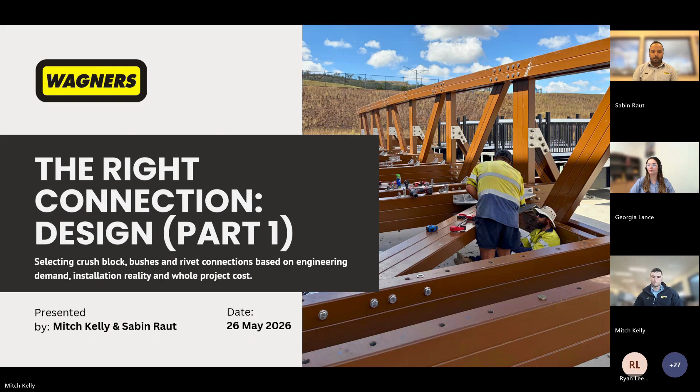So we'll work through some basics of the design, then look at 3 real optimization examples where connection detailing was refined to improve constructability and costs without compromising structural performance. So by the end of this session, you should be able to answer 4 practical questions. First one is, what are the 3 main types of connections used in FRP structures? Second, how do load type, direction and magnitude influence selection of these 3 connection types? Third, how do hollow profiles and fiber orientation affect performance?

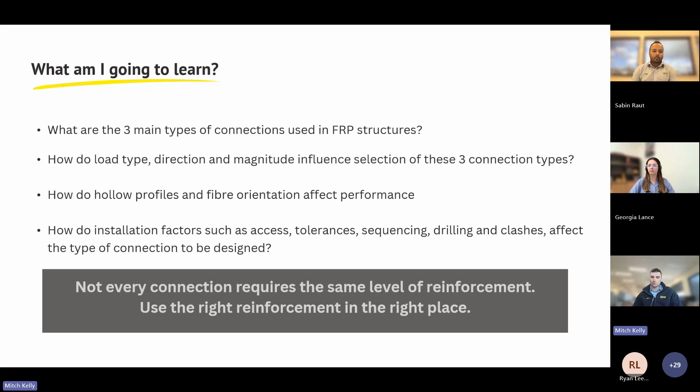And finally, how do installation factors such as access, tolerance, sequencing, drilling and clashes affect the type of connection to be designed? So the aim is not to memorize a single rule. The aim is to understand the decision process so we can use the right connection type in the right place. So what are we going to cover? We're going to start with why connections often govern FRP performance, because connections are where the load path becomes most concentrated. Then we will look at FRP material behavior and common failure modes, because FRP does not behave like steel or solid timber.

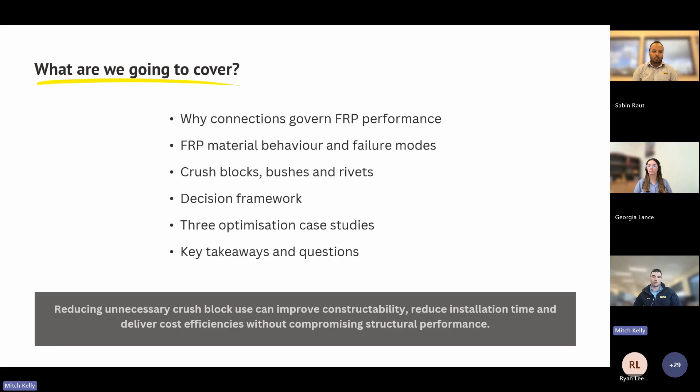So why do connections matter? In any structure, the member or structural component itself can be strong, durable, and well designed, but if the connection does not transfer load correctly, the system will underperform. For FRP, this is especially important because the material is directional and connection loads can introduce localized failure modes. So when we talk about connection design, we're really talking about facilitating the load path.

So for an example structure, loads need to be transferred from the deck to the joist to the bearer, from the bearer to the column or pile, and then ultimately into the foundation. And at each transfer point, the connection becomes a critical stress region.

So just a photo here, the Hyatt Regency walkway collapse is a well-known reminder that connection detailing can govern structural performance. So in that case, the failure was not because the idea of a suspended walkway was inherently impossible. The issue was the connections and how the detail actually carried the load. So not overly relevant to the presentation, but a reminder that the devil can be in the detail with connection designs, and an oversight can have disastrous effects.

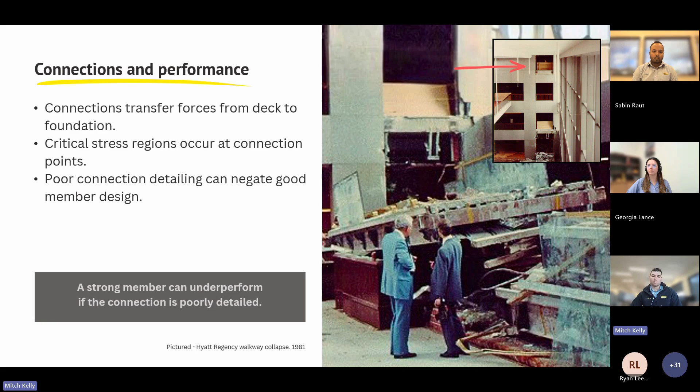So the central idea I want to highlight in this presentation is engineering judgment. Basically, there's not going to be a one-size-fits-all connection type, and a number of things need to be considered. I mentioned crush blocks earlier, and we'll get to them shortly, but the aim is not to remove crush blocks. Crush blocks are important and necessary in the right locations. The aim is to stop using them where the connection selection framework does not justify them.

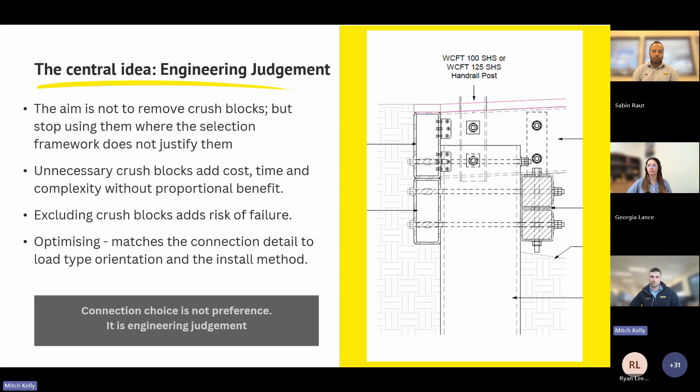If we add a crush block where it is not necessary, we add direct supply costs and installation time and complexity without a proportional structural benefit. And obviously, if we completely exclude crush blocks, then we risk crushing, pull-out, delamination, fatigue, or poor long-term performance. So optimization sits between those two extremes, and it means matching the connection detail to the load type, orientation, and the installation methodology. That is the mindset that will become key when we get into our case studies.

Okay, before we compare connection types, we need to look at why FRP connection design is different to traditional materials. So FRP is very strong, lightweight, and corrosion resistant, but it is not isotropic, it is anisotropic, which means it does not behave the same in every direction. This becomes a key consideration for connections.

So pultruded FRP has a very strong longitudinal performance because the fibres are predominantly aligned along the length of the member. If you can imagine trying to pull apart a plaited rope, it is very strong. But transverse is different. It is not as strong due to having less fibre percentage in the transverse direction. So loads acting across the fibre direction, through the wall or around a fastener hole can create local effects that do need to be managed. FRP also has a lower shear modulus than steel, so local deformation and load transfer need to be considered carefully.

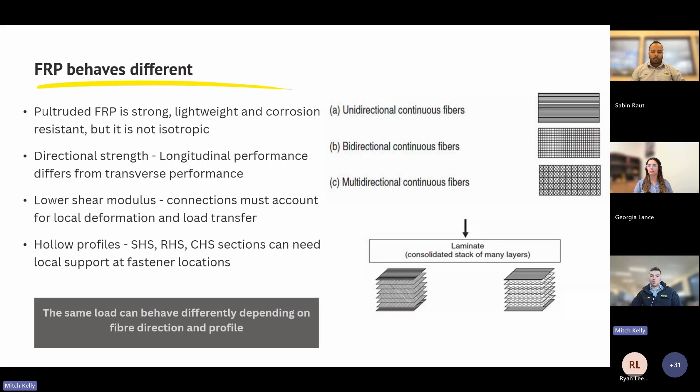And because many structural FRP profiles are thin, hollow walled sections, such as SHS, RHS, and CHS sections, the wall of the section may need local support at fastener locations. So that's where crush blocks and crush tubes come in. So the same external load can require a different connection depending on the fibre direction and the profile you're using.

So section geometry is often the difference between a necessary crush block and an unnecessary one. Wall thickness affects local bearing and crushing resistance. A thin wall will obviously behave differently to a thicker wall under the same load. And hollow sections can also be vulnerable to local wall deformation, particularly when a bolt is over tightened or when you introduce a load through a small contact area. And as touched on before, loads acting along the fibre direction is not the same as going across the laminate.

So as counterintuitive as it might sound, using a larger profile to reduce connection complexity may end up being the better option for a project. As a rule of thumb, thin-walled hollow sections with transverse load demand tend to require crush blocks. Thicker wall sections or connections dominated by longitudinal force may be able to use bushes or riveted brackets.

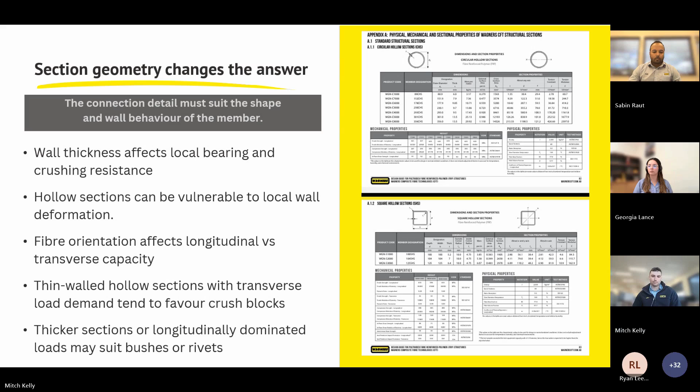Connection design, especially in FRP, is really about managing local failure risks. Fastener holes can create stress concentrations. That means the area around the hole can become a starting point for failure if the load is not properly distributed. FRP can also be more vulnerable where loads act through the thickness of the laminate because that's not where the material is typically strongest, as mentioned. And if the load is poorly distributed, the laminate can delaminate, which means the layers of the FRP can actually pull apart rather than acting together. This would generally be at risk, similar to before, when you're using thin-walled hollow sections when the load is in the transverse direction.

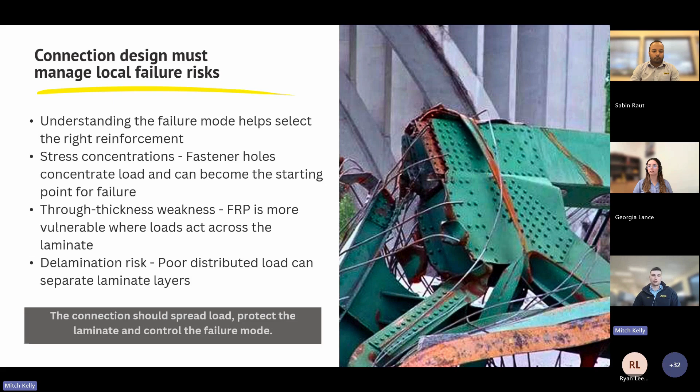Some other common failure modes need to be considered in FRP and probably generally in other materials as well. So bearing failure, local damage on or around the contact point by a concentrated load. Net tension, which is when the remaining section left around a hole is not sufficient to carry the tensile force. Shear out occurs when the fastener tears a path towards the edge of the member. Cleavage is a splitting type failure, delamination is separation of the laminate layers, as mentioned, and bolt pull through occurs when the fastener or washer zone pulls through the section.

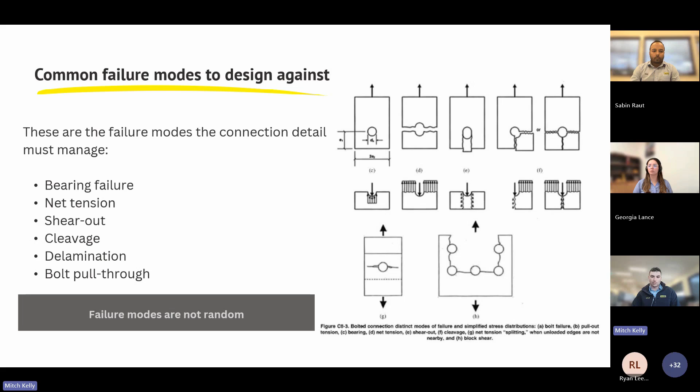The important point is that these failure modes are not random. They are influenced by load direction, magnitude, edge distance, bolt hole sizes, bolt spacing, and wall thickness.

Now that we have covered the material behavior, we can look at the three main practical options used in FRP design. The three options are crush blocks or inserts, bushes or crush tubes, and rivets. Each has its place, and the challenge is deciding on the best option for each connection.

At a high level, crush blocks provide the highest local reinforcement for high demand bolt joints. Bushes provide a middle ground solution. They support the bolt hole and help distribute local stress and improve bolt performance where full transverse reinforcement is not required, as well as eliminating the crush of the hollow sections when the bolts are actually tightened. Riveted connections are usually in conjunction with a bracket and are permanent, efficient, very fast, and for lower demand joints, particularly where access or alignment makes bolting more difficult.

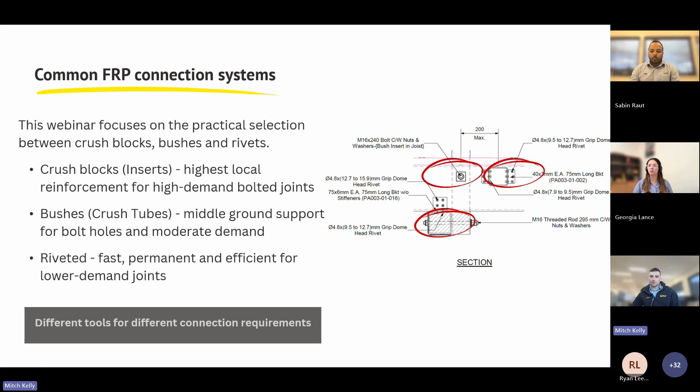The right system depends on loading, FRP properties, as mentioned earlier, and the installation method, so access, sequencing, and site limitations. We should not think of these as good or bad options. We should think of them as different tools for different connection conditions.

Crush blocks, when they are required. Crush blocks are required where the connection needs the highest level of local reinforcement. Typical triggers for these are high compression, high bearing, high shear, or high pull-out loads. They're also important where long-term bolt preload is critical to be maintained, and where the dominant stresses act transverse to the fibre orientation, as I was saying before, or when wall buckling is at risk for a thin-walled profile.

So they therefore are generally appropriate for high consequence primary structural joints where we need the most robust connection behavior. More often than not, in those situations, the crush block is not overkill. It is the correct engineering response for the demand.

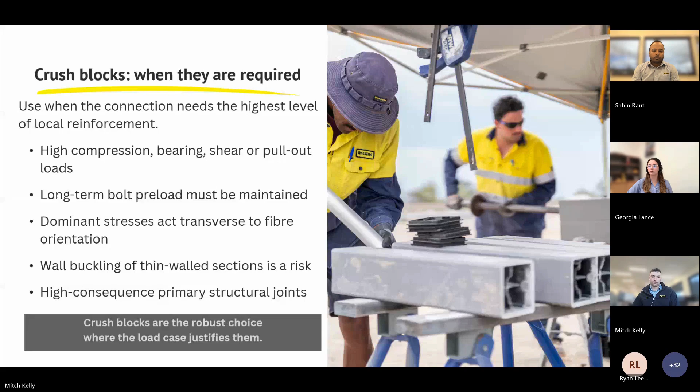Crush blocks, when they may be more than needed. The issue is not in the use of crush blocks. The issue is using them everywhere by default. Often crush blocks can be an extreme installation burden.

To install a crush block or insert, the member needs to be pre-drilled in the precise bolt hole location. Then the crush block is pushed down the member and aligned with the hole. That takes time, especially when the detail is repeated many times across a structure. It is also often not feasible when setting out a structure, as the bolt hole locations are sometimes not known until the members are actually installed, in which case it's often too late to be able to push the inserts in. And they also generally allow for no tolerance at all during installation.

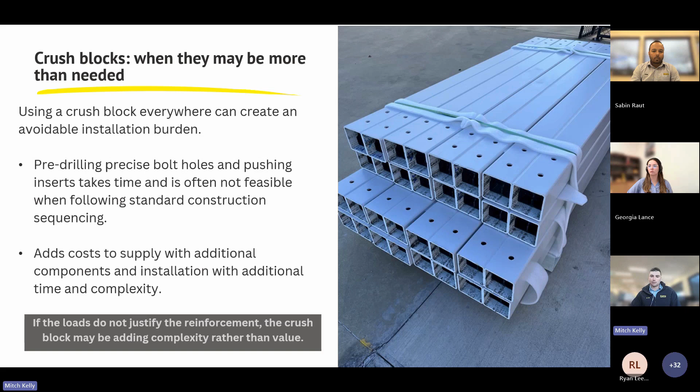And they also just add additional costs, supply costs through extra components, bolts, brackets, additional drilling, especially when you can potentially substitute with something like a riveted bracket.

Bushes, or sleeves, or crush tubes, they're a practical middle ground. They're useful where the dominant force is longitudinal or moderate, where pull-out forces are low to moderate, and where crushing demand is lower. So when compared to a bolt alone, they improve bolt torque and tightening capacities, and they help distribute the local stress around the bolt hole.

A bush is not the same as a crush block. It does not provide the same level of transverse reinforcement. But where the demand is moderate, it can protect the laminate and improve constructability without the burden of a full internal insert.

They can be drilled and installed while the member sits in the final position, and are useful when the hole position cannot be central to the member, so they create more tolerance and speed for installation as opposed to crush blocks. That makes bushes particularly useful when you need the performance of a bolted connection, but also want practicality for install.

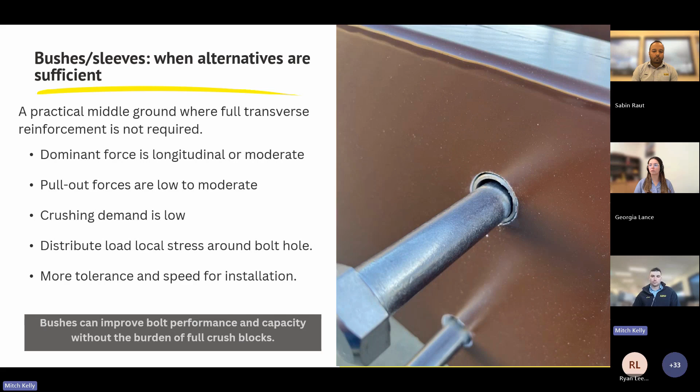Rivets. Rivets are the efficiency option. They suit permanent, lower demand, non-critical connections where the loads are low to moderate. They eliminate all the alignment issues that are present with bolted connections as they are drilled and installed in their final position. Similar to how a nail or screw would be used in timber with an L bracket or plate, that's basically the same principle for rivets.

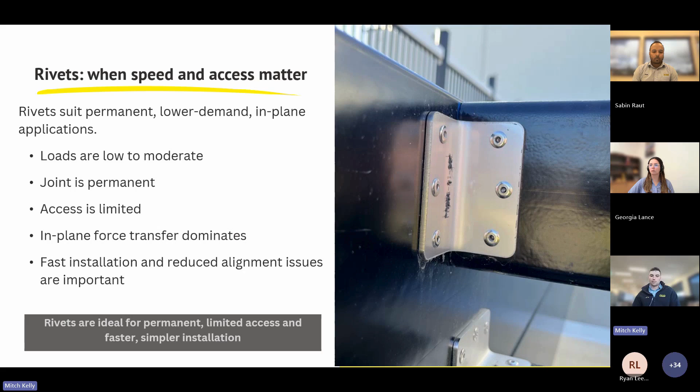Rivets are obviously not going to work in a critical high shear transverse load case, but can often make up the majority of the connections in a structure like a boardwalk. They're the right answer when the load case allows speed, simplicity, and permanence to become the priority.

This slide is important because it challenges a common assumption that the strongest detail is always the best detail, which is not always true. Crush blocks provide the highest security for high demand joints. Bushes provide a good balance where performance and easy installation are needed, and rivets are efficient and fast. Optimized design is about enough strength, safe installation, cost effectiveness, and the best whole of project outcome.

So the question shouldn't really be what is the strongest possible connection. The better question is what is the simplest connection that safely satisfies the engineering demand and can be easily installed.

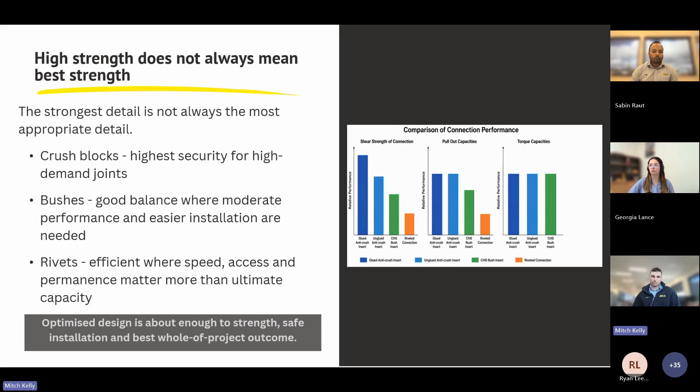Part 4, selection framework. Now we will turn that thinking into a practical selection framework. This is not a replacement for engineering design checks or capacity tables. It is a way to structure the decision so we start in the right place every time.

So the first filter is load. Start by asking what are the types of loads the connection is carrying? Is it tension, shear, bearing, or crushing? Then you ask about direction. Is the load acting along the fibre direction or across it? If it's along, you can use bushes.

Across, you need crush blocks. Then you consider the magnitude. If it's high pull out, high shear, or high bearing demand, you usually have to go towards the crush block. If the demand is moderate, a bush may be appropriate. And if demand is low, a riveted bracket may be sufficient. So the first decision point is just what is the connection actually doing?

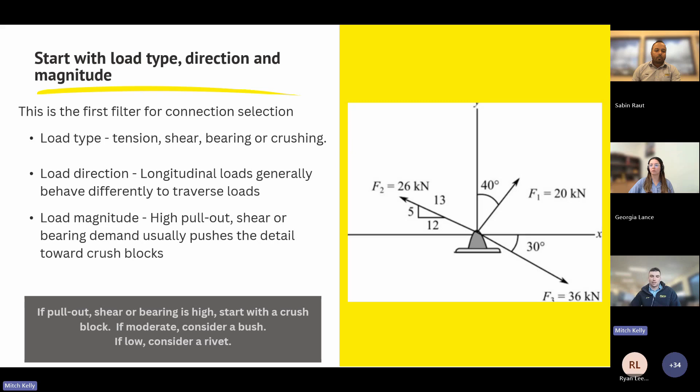The second filter is actually the FRP section. So if you know the load type, direction, and magnitude, now you've got to work out which profile to use. Check the wall thickness and the published connection capacities for the likely FRP profiles you're thinking of using. Then ask whether the wall could potentially crush, buckle, or delaminate, and lock in some potential connection options, as there's always generally more than one connection option, even when you get to this stage.

So it's key to assess each connection point individually as well. Don't assume that one connection detail needs to fit the whole structure, because that can often lead to oversights and missed opportunities for improvement.

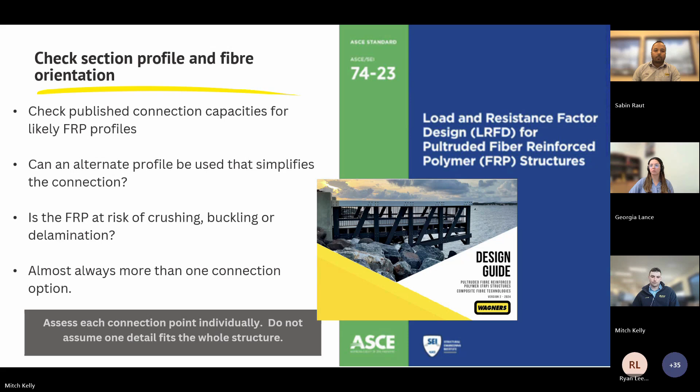And the third filter is installation. A structurally sound detail still needs to be practical and safe to install. This is our last step to really lock in the connection design. Can the installer physically position, align, and complete the connection? Does the detail allow for slopes, bolt hole eccentricity, site drilling, alignment? Does it create clashes, slow assembly, or require extra handling?

How often is the connection repeated across the structure? Access, tolerance, sequencing, drilling, and potential clashes can all determine the best detail, and this is where design and construction need to meet.

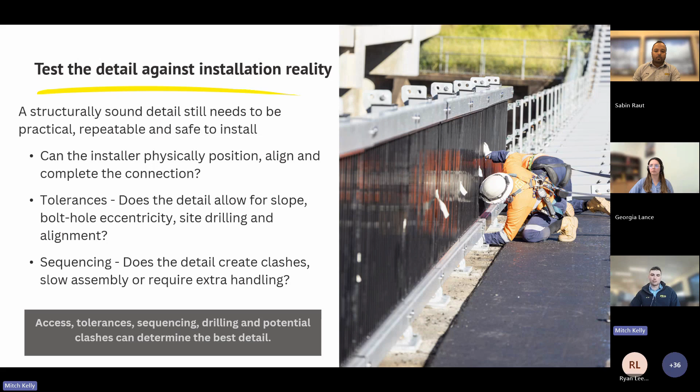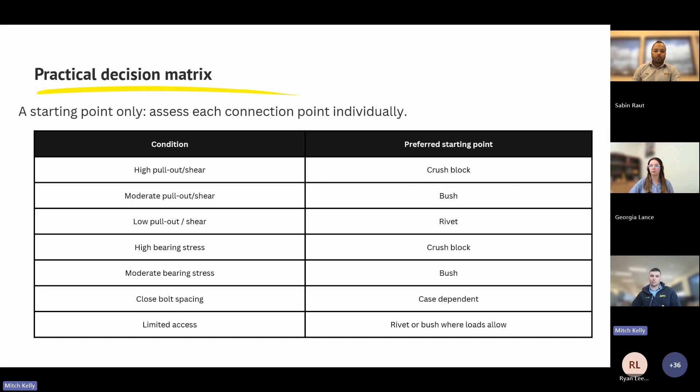It's worth noting that oversized washers, which we'll see in a moment, improve the pull out capacities of bush connections, so there's opportunities for improvement there. For low pull out or shear, a riveted bracket may be appropriate. For high bearing stress, start with a crush block, and for moderate, maybe a bush. Close bolt spacing, access, and installation are more case by case, but they do need to be considered.

Same requirement, multiple solutions - this is where optimization becomes possible. A connection can satisfy the same requirement more than one way. A joist-bearer connection, for example, can be detailed with a through bolt with crush blocks or tubes, a bolted bracket again with crush blocks or tubes, or with riveted brackets. So the best detail is the one that satisfies the capacity while improving constructability and reducing overall project costs.

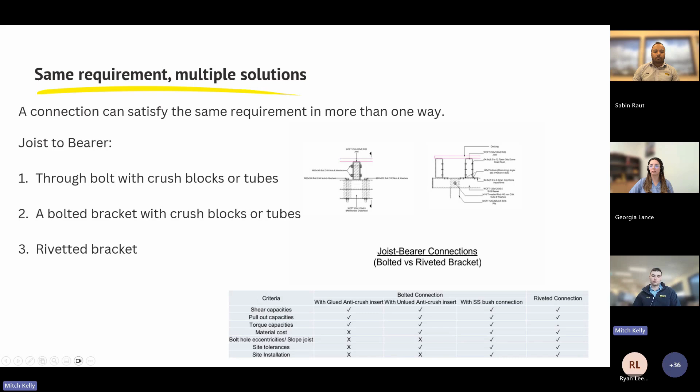Case studies. Now we will look at 3 case studies that show how this optimization works in practice. Each case study demonstrates the same principle: optimization is not about reducing performance, it is about removing unnecessary complexity where the engineering review shows a simpler detail is sufficient.

The first case study is Jindalee Beach Stairs. This project involved repeated pile, joist, stringer, and bearer connections, and handrail post connections as well, as you'd expect from a set of stairs. It was also a very tricky site with footings only able to be placed in certain locations in the sandstone rock, so tolerance and flexibility in the connections was a must.

The original design issue was that multiple bolted bracket connections and anti-crush inserts, along with those site tolerances, created a design that was almost impossible to install without on-site modifications. The original design was very sound and every connection was adequate. So the aim in optimization was to keep structural performance where required and maintain the good design work that had been done, but simplify the lower demand connections using riveted brackets and through bolt details where possible.

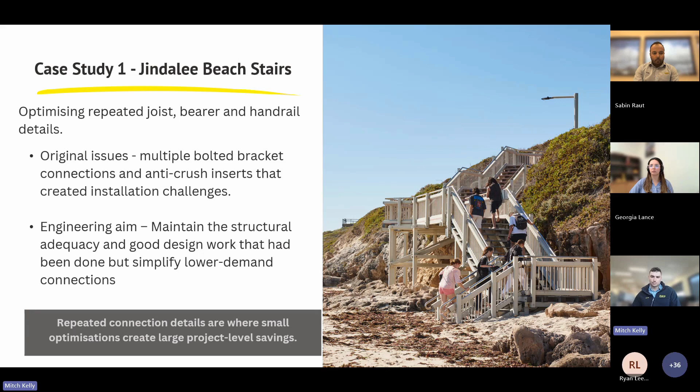So what changed? There were 4 main changes.

Firstly, the inner joist-bearer bolted bracket connections were replaced with 3mm riveted brackets. This avoided pre-drilling and pushing more than 10 anti-crush inserts per bearer.

Obviously there are a lot of bearers in the structure. If they're not perpendicular to the joists due to site constraints and pile positions, then there is no way to pre-drill all the bearers beforehand.

They need to be done based on joist locations, which are unknown until the bearers are actually sitting next to the piles. And once the bearers are attached to the piles, there's actually no way to push those inserts into the bearer for the joist connection because they can't push past the crush blocks that are in there for the pile connection.

So the second change is the outer joist-bearer bolted bracket was replaced with a heavier gusseted riveted bracket. Similar to the previous change, this avoids the inserts and simplifies the connection, but the heavier gusseted bracket was able to overcome the loading from the handrail post.

Third change was the stainless handrail offset bracket at the top of the post, changed from a through bolt to a standard riveted offset bracket. This avoided pushing the insert into the top of the post, which was potentially creating clashes and removing tolerances in that connection.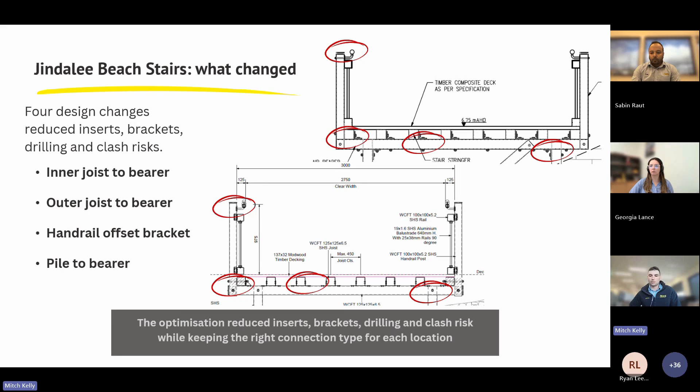The supply cost reduction after the design optimization was actually passed through to the client as a discount from the quoted price on this job.

The second case study compares the old and new handrail post connection design from Lake Orr Boardwalk to Kangaroo Point Boardwalk.

The old approach used inserts in the outer 250 by 100 RHS joist for the connection to every handrail post. That was conservative, and it was also very time consuming to install.

Design checks and testing enabled the removal of these inserts in the outer joist by using crush tubes with an oversized square washer on the back face of the joist to increase pull-out capacity of the connection. This is a good example of testing turning a conservative detail into a faster, repeatable standard detail.

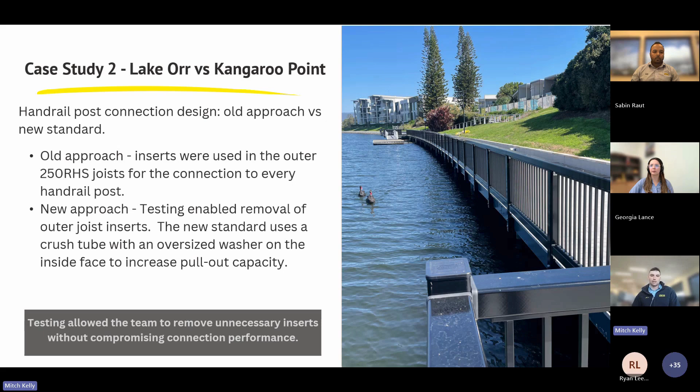As for the installation lesson, removing these crush blocks meant there was no longer a need to push them into the joist for every handrail post. This original detail becomes very time consuming, especially for larger spans when the crush blocks need to be pushed like 6 meters plus into the joists.

And on large projects, there could be 1,000 plus handrail posts. So it can quickly become weeks or even months worth of work to actually install those inserts.

Using bushes means the holes can be drilled in position to suit the handrail post after the superstructure is complete, and there's no need to position the internal crush block. So on both large projects, the install cost reduction of the handrail post to joist connection becomes very significant on this scale.

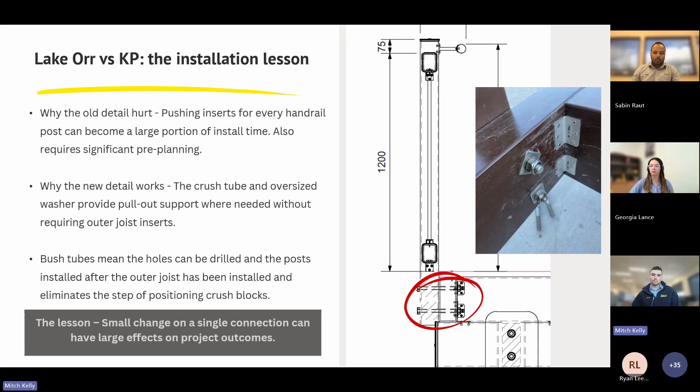Case study 3 is the Botanica Sewer Bridge. This is another Wagners internal design optimization, focused on safer and more tolerant installation.

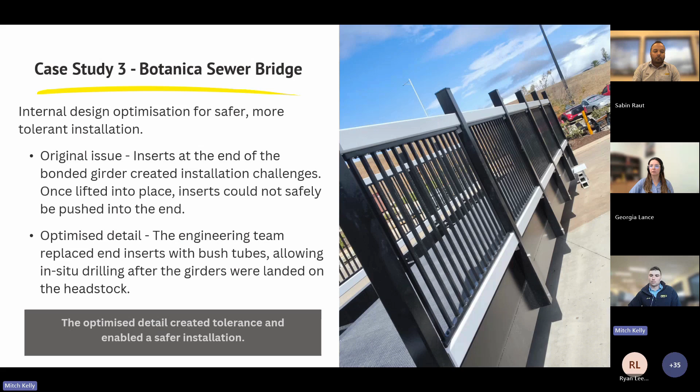The original issue was that inserts at the end of a bonded girder created installation challenges. Once the girder is lifted into place, the inserts could not be safely installed in the end of the girders. So the optimized detail replaced those end inserts with bush tubes, allowing the girders to be landed on the headstock first, then drilled in situ.

This optimization improved 3 things. First, tolerance: in situ drilling allowed the final connection to suit the landed position.

So you aren't relying on tape measurements across a 10-meter span, taken from scaffolding, measurements that need to take into account pile skew and squareness, which becomes really difficult to get accurate.

Secondly, safety: the installers will no longer have to push those inserts into the end of the girder after lifting, which could potentially involve awkward body positioning and safety risks.

And lastly, constructability: the bush tubes simplify the installation sequence while maintaining the required connection performance.

Originally, if they weren't to push those inserts in awkwardly up on the headstocks, they'd have to lift the spans onto the headstocks, mark all the bolt hole locations, bring them back down, drill all the holes and push the inserts in, lift it back up and complete the bolted connections, all the while maintaining a 1 mil either side bolt tolerance, and having a crane on site for potentially twice as long as you need. So for this one, the key lesson is that sometimes the right connection is the one that makes safe installation possible, even if it doesn't appear to be the simplest and easiest from a design perspective.

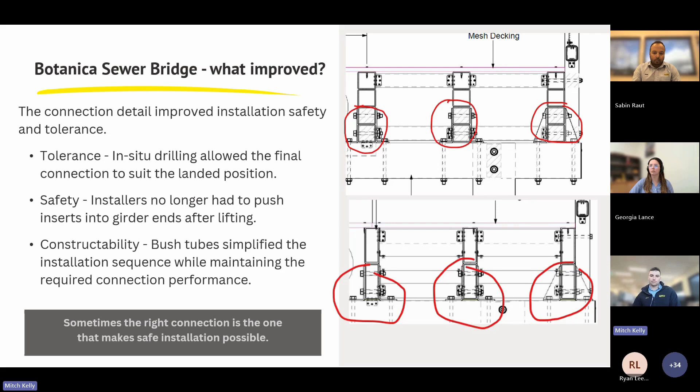So across all 3 case studies, the same principle appears. At Jindalee, repeated brackets and inserts were simplified to reduce labour, clashes and supply costs. At Lake Orr and Kangaroo Point, testing removed the unnecessary outer joist inserts and created a faster standard detail that can be used for future projects. And at Botanica, the bush tubes replacing the inserts improved tolerance and safety for the in-situ installation. So reducing crush blocks is not a shortcut, but is the result of engineering review, judgment, and thinking about the constructability.

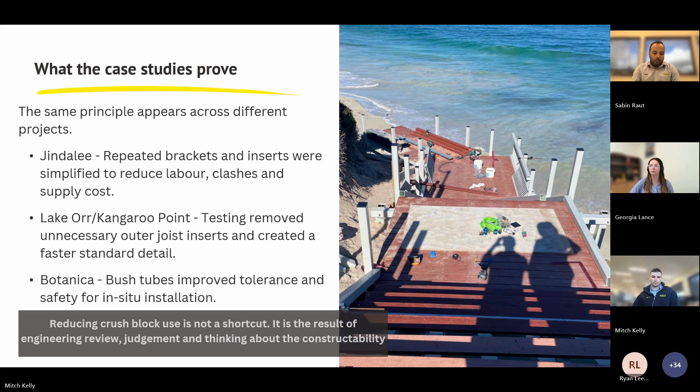We will finish with simple decision logic to take back to future design. So the goal is to not make every connection lighter or remove all crush blocks. The goal is to make every connection appropriate. So if you're going to remember one slide, try and make it this one.

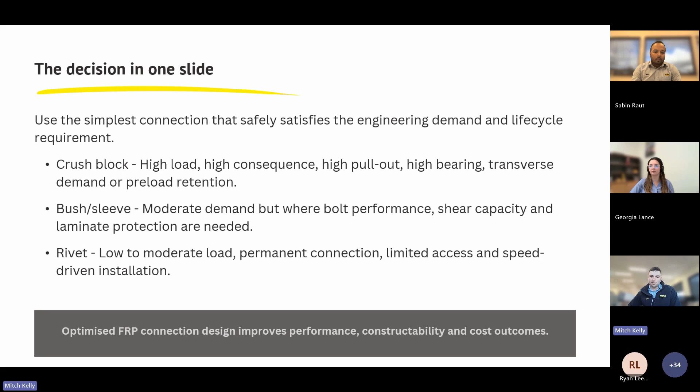Use a crush block or insert where there is high load, high consequence, high pull-out, high bearing, transverse demand, or preload retention. Use a bush or crush tube where there is moderate demand and the goal is to improve bolt performance, shear capacity, and laminate protection. Use a rivet or riveted brackets where loads are low to moderate, the joint is permanent, access is limited, and installation speed and efficiency matters. So in short, the simplest connection that safely satisfies the engineering demand while taking into consideration the supply and installation costs.

Just some key takeaways. Connection selection starts with understanding the load type, direction, and magnitude. FRP section geometry, wall thickness, and fibre orientation directly affect connection performance. Crush blocks are required where the demand is high, transverse, high consequence, or preload critical. Bushes and rivets are sufficient and beneficial where the load requirements allow. Installation, access, tolerances, sequencing, drilling, clashes, and maintenance can determine, and often do determine, the best detail. And lastly, spending time to optimize and make the right connection selection improves constructability, reduces installation time, and delivers cost efficiencies without compromising structural performance.

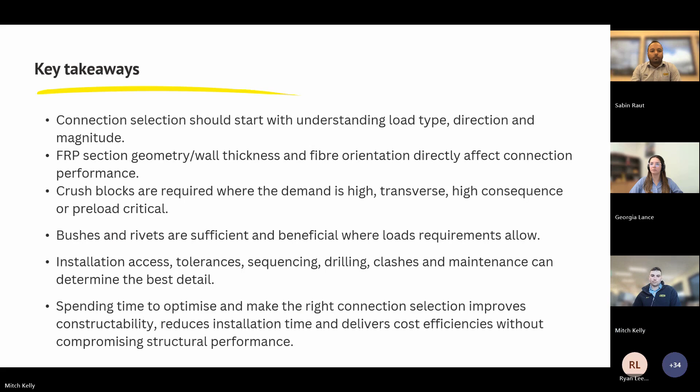All right, that brings me to the end of the presentation. I'll now hand it back over to you, Georgia, for the Q&A.